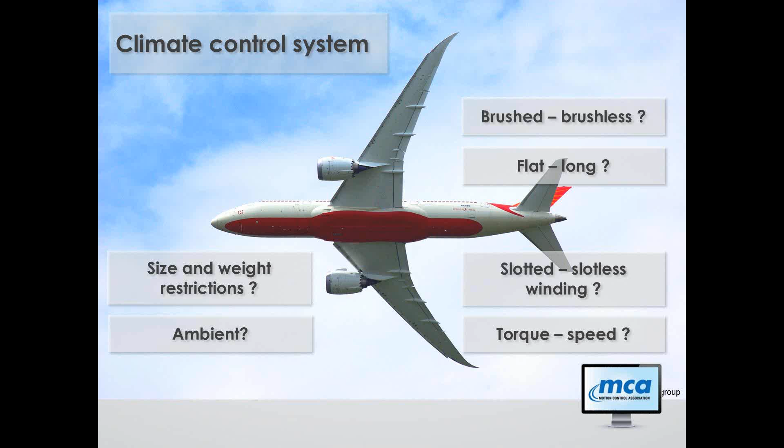Before we start to answer all these questions, let's look at the kind of motors we are considering during this webinar. It's all about small DC motors with permanent magnets, up to a power of less than 1 horsepower, so let's say approximately 700 watts. In the following, I'd like to treat these topics.

First, some background information about which motor designs are good for high speed or good for high torque. Second, I would like to address the selection of the commutation system - is this a motor without or with brushes? After that, a few remarks about slotted and slotless designs. And at the end, some guidelines for motor selection according to torque and speed requirements.

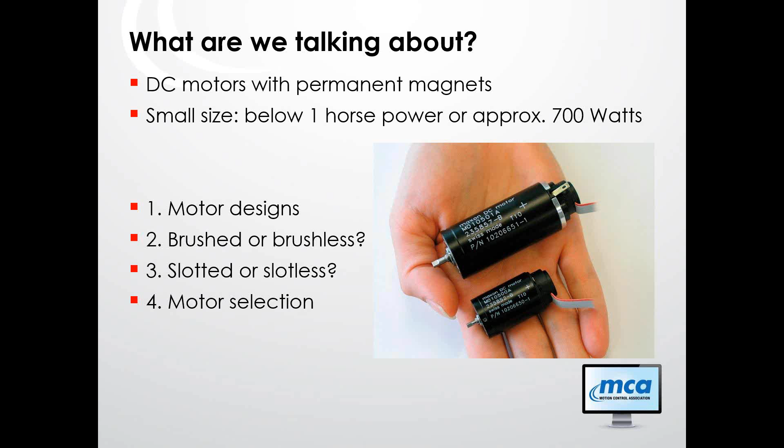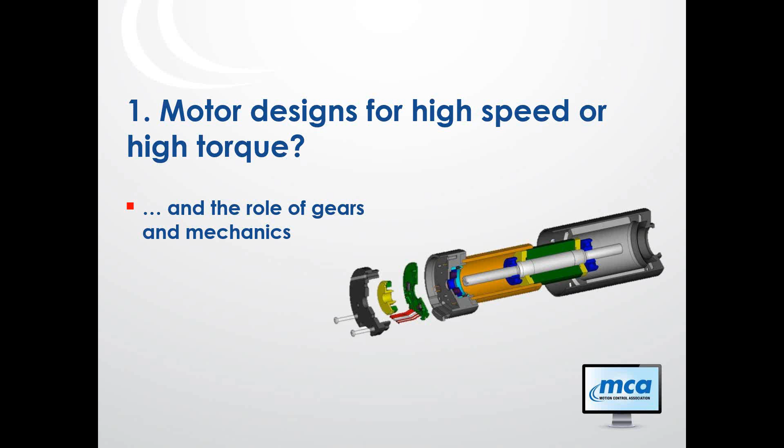So let's start with the motor design for high speed or high torque. In a natural and logical way, this will lead us also to the role of gears at the end.

We represent the speed and torque capability of motors in a diagram with torque on the horizontal axis and speed on the vertical axis. Here, the axis scale is something like logarithmic, but don't take the axis values as absolute - they should rather give an indication of the order of magnitude of speed and torque.

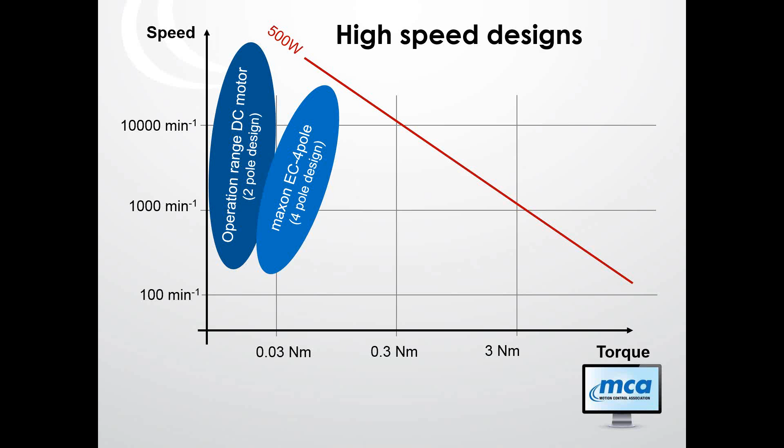Motors that can run at high speed but rather low torque are typically long and have a rather small diameter. This allows keeping rotor inertia and unbalance low, and at the same time the bearing distance large - both important for low noise and low vibration operation.

Here we find the standard brushed Maxon motors with one magnetic pole pair and coreless winding. For speeds above 10,000 RPM, brushless motors with similar electric and magnetic designs are used. Motors with two magnetic pole pairs exhibit a higher torque density, however, at a somewhat lower maximum speed. Now, what are the typical applications for such high-speed motors?

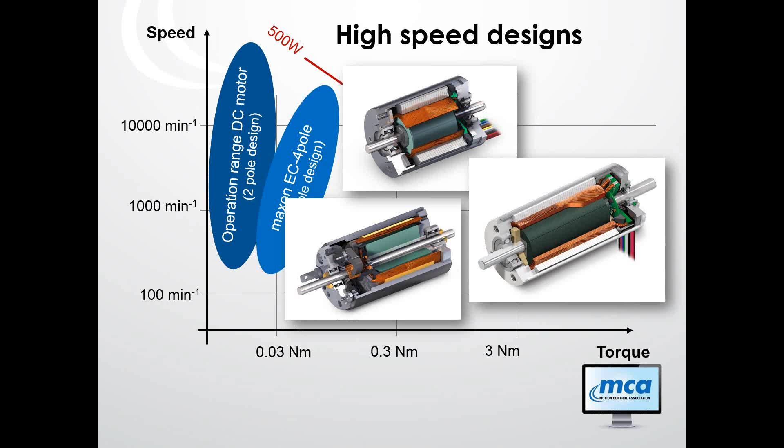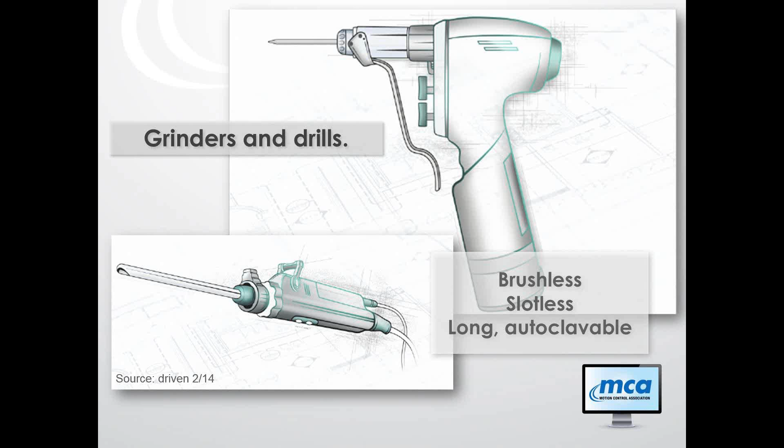Typical high-speed applications are grinders, millers, fans. Here are some examples from the medical field. They all use rather long, thin types of motors with a long shape and a small diameter.

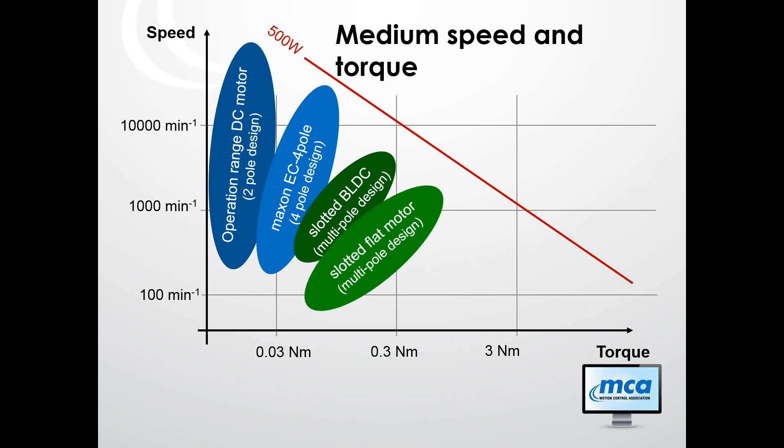The more magnetic poles we have in a motor, the lower the possible speeds, but the higher the torques in general. Multipole motors are usually made with a slotted winding for more precise magnetic flux confinement. Increasing the diameter with respect to motor length accentuates this design for high torque. So you find here typically the flat motors, often in a slotted design with external magnet.

An interesting design variant here is to place the rotor at the inside. The multipole magnet gives a high torque while the rotor inertia is still small. As a result, these motors are extremely dynamic.

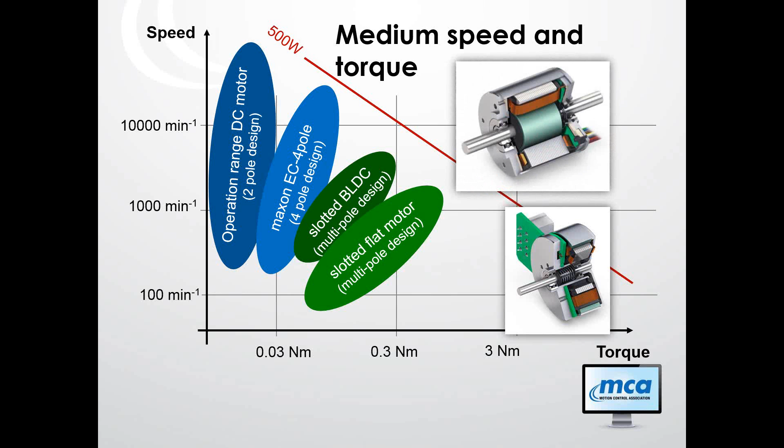A typical example for applications that need a relatively high torque at moderate speed are all kinds of pumps. In this example, a single brushless Maxon flat motor drives the vane pump of the air cushion. By varying the filling of the air chambers, the passenger can steplessly switch between firm and soft settings. What a nice feeling if you're traveling business class.

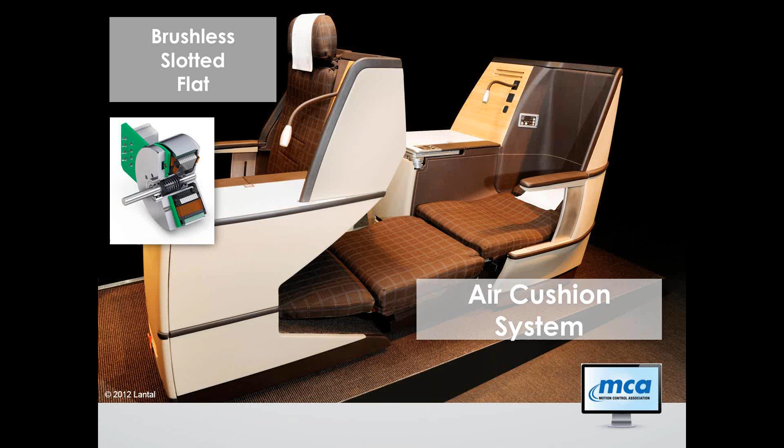Going back to our diagram, maybe a word about stepper motors. What do you think? Where do they fit into this diagram? Let me answer this question at the end of this section.

In real life, however, there are many applications that don't need real high speeds, but rather what they need is high torque. Let's say speeds below 1,000 RPM, but torques of the order of a few Newton meters. Many manufacturing or humanoid robots work in this range.

If we continue the motor design path towards higher torques at even lower speeds and using more and more magnetic poles, we end up with something that could be called multipole direct drive. You can find such motors under the name of torque motors as well. Essentially, true linear motors could also be placed into this category.

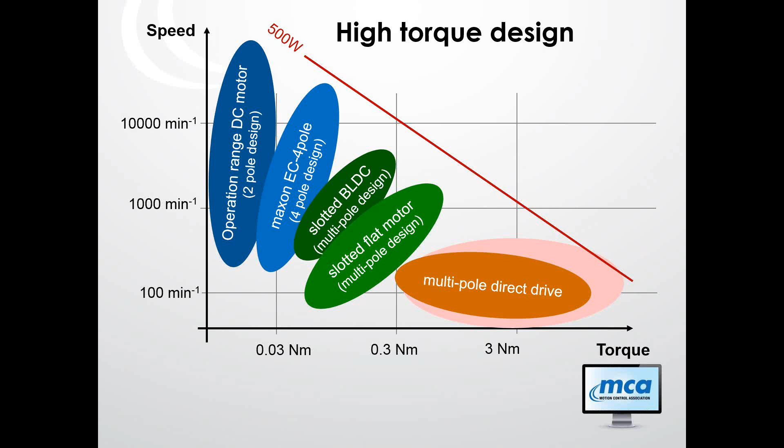This is why an alternative is to use standard higher speed motors off the shelf with mechanical transformation elements such as a gearhead. In most cases, the costs are just a fraction of a large direct drive motor. Motor gearhead combinations are standard products of many manufacturers, and you can really get them off the shelf in a proven design and with many variants and options.

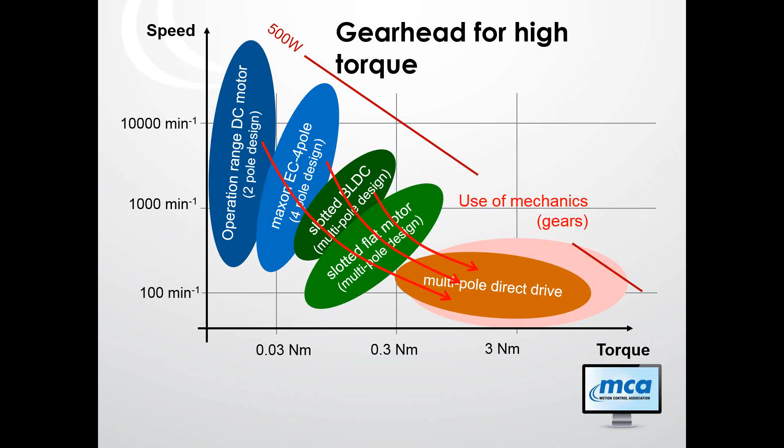A very special kind of mechanics is used in the robot, a robot that mimics the construction of the human body with motors and springs as muscles and ropes as tendons. It's, in my opinion, a nice example to show that mechanics needs not to be a gearhead all the time.

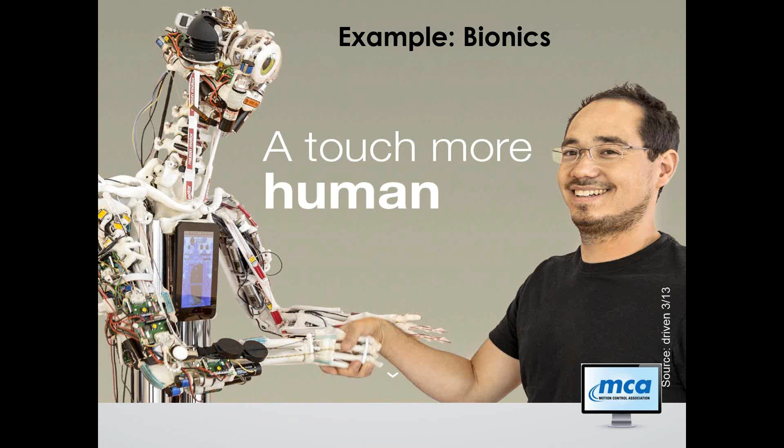So here we come back to the question about stepper motors. Stepper motors are characterized by rather low speed and limited dynamics and acceleration properties, so I place them in the lower speed, lower torque corner. Steppers often exhibit a relatively high noise and vibration level, depending on the sophistication of their control. Their advantage lies in the built-in positioning, which makes them interesting for positioning tasks.

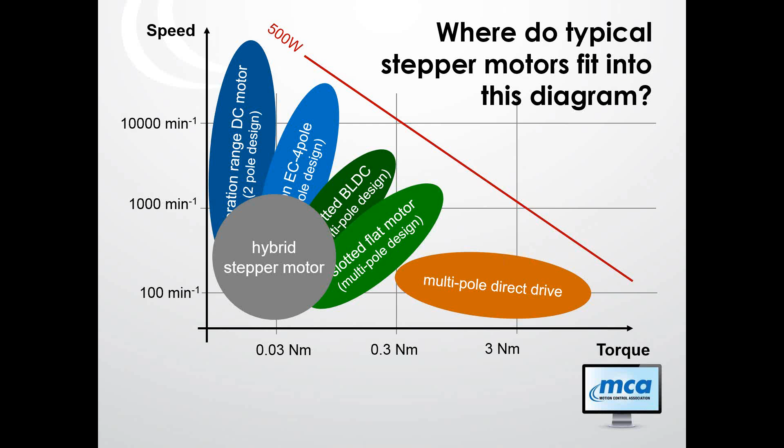The lack of time here does not allow us to go deeper into the DC stepper motor comparison, so let's stick to the DC motors. The next question we address in this chapter is: what's the difference between a brushed and a brushless motor? At Maxon, brushless DC motors are called EC motors. EC stands for electronically commutated motors.

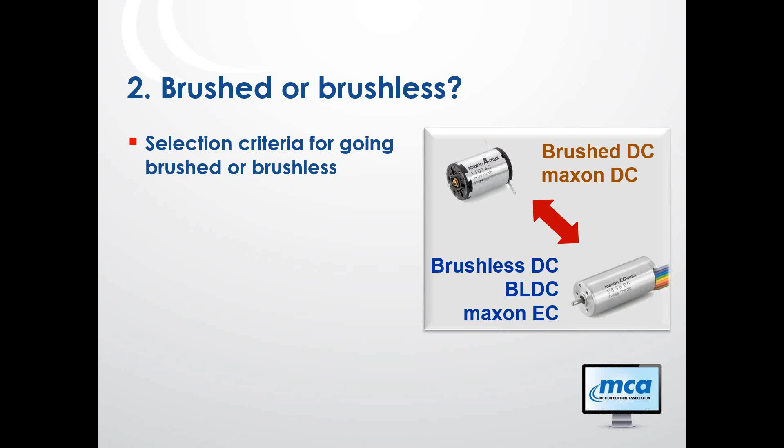The most important difference between brushed and brushless motors is service life. Brushed motors suffer from a limited service life of the brushes. Usually you can achieve a few thousand hours, in best cases up to 10,000 hours, in worst case less than 100 hours. Brush life is difficult to predict and there's no secure way to calculate it. A lot depends on the use: high current, high speed, left-right operation, high vibration reduce service life. All you can do is make some guess on service life by comparison to similar applications and operating conditions.

A few thousand hours of service life, however, are sufficient for many applications. Some applications with continuous operation need more service life — maybe several 10,000 hours — and the use of brushes should be avoided.

In brushless motors, the expected life of the ball bearings essentially limits the service life. Ball bearing life is much better understood than brush life and can be estimated quite accurately. Typically, they're made for several 10,000 hours.

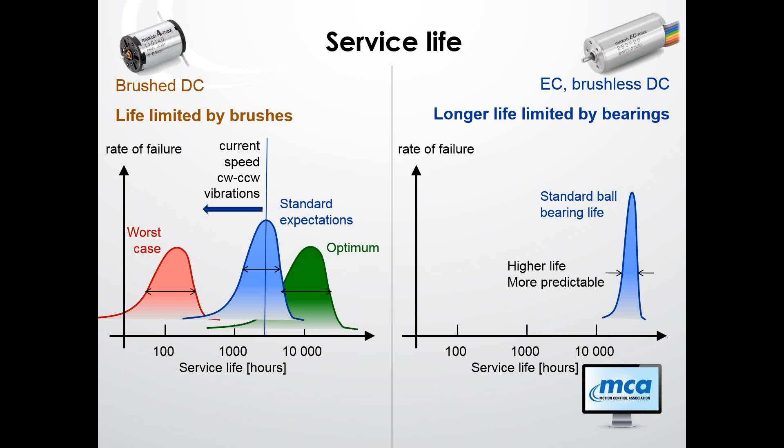But still, keep in mind, there are many applications that really don't need the high service life of a brushless motor. In motorized golf caddies, for example, service life doesn't need to be really high. Assuming 2 golfing days per week and 1 hour of effective operation per course, you get about 100 hours of operation per year, so there's no need to go brushless. The service life of a high-efficiency brushed motor is perfect.

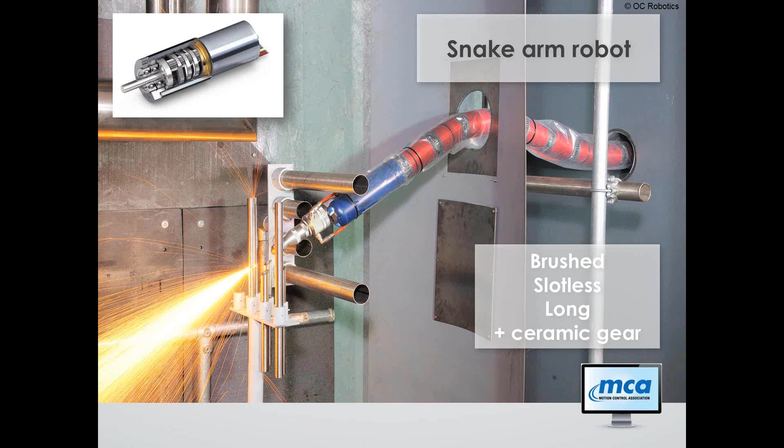The situation is completely different in this snake arm inspection robot for use in aircraft assembly, nuclear power plants, or the inspection of sewage systems. Operation might be up to 24 hours a day. Accordingly, a brushed motor design with a high service life ceramic gear is used in this case.

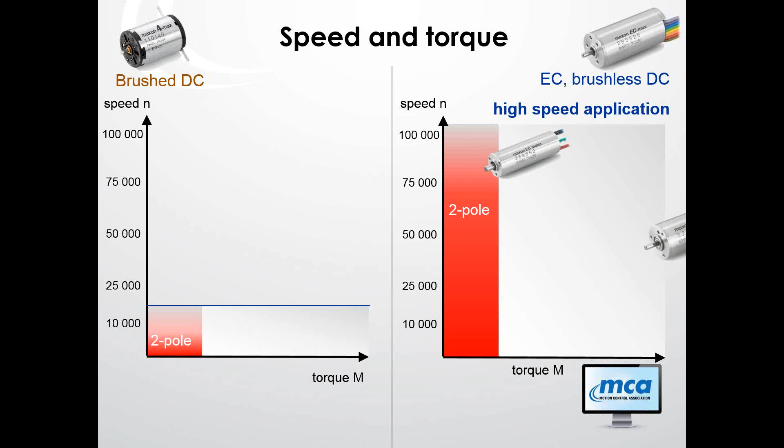What are the differences between brushed and brushless motors concerning speed and torque? As a starting point, let's take a brushed DC motor of a given size. In most cases, maximum speeds of DC motors are limited to values below 20,000 RPM. A brushless EC motor of similar size and magnetic design can be operated at much higher speed, reaching 100,000 RPM in some cases. These are perfect motors for applications running at high speeds, such as grinders, cutters, and some blowers. As mentioned before, brushless motors are often made multi-pole with a slotted design. This enhances the torque, but at the cost of speed.

Do you have any idea what happens to a brushed motor if operated at these high speeds?

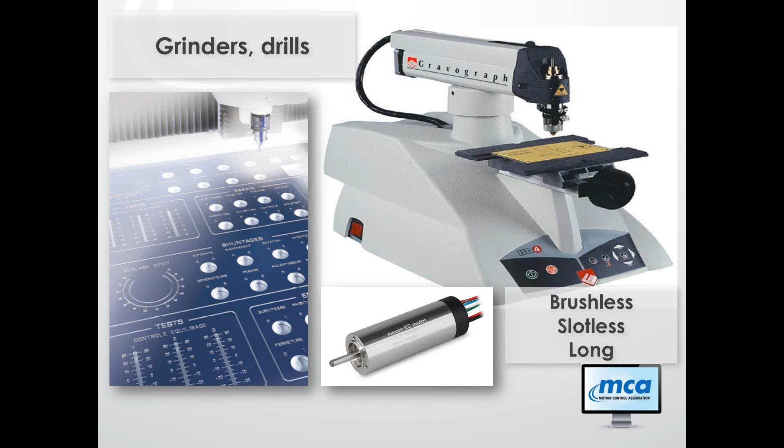Coming back to my question, brush motors can also be operated at higher speeds than specified. However, one has to expect a strongly reduced service life due to increased electrical and mechanical wear. The brushes start to vibrate, there's more brush fire, and the motors will be more noisy. However, keep in mind, you will have to look at the specific data sheet of each motor to get the information about maximum speed and torque capabilities of each unit.

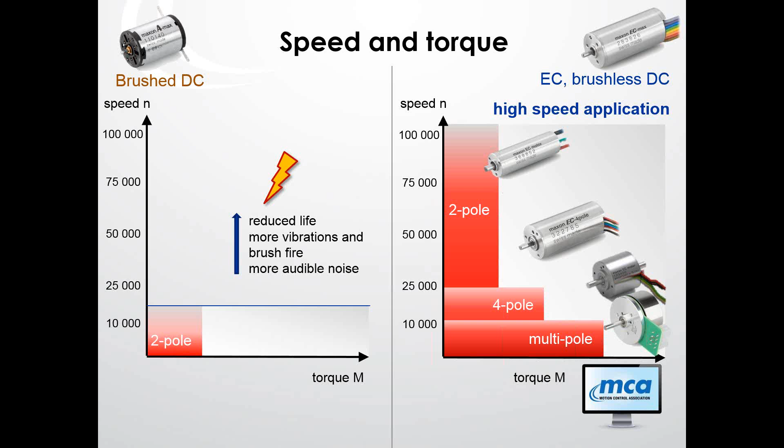How about the suitability of motors for special ambient conditions? Brushed motors can cause complications in special ambient conditions. Brush fire is at the origin of electromagnetic noise which might require additional damping. In explosive gas ambient, the sparks might also not be too welcome. However, note that the brushless motor is not explosion-proof by design. Further modification would be necessary.

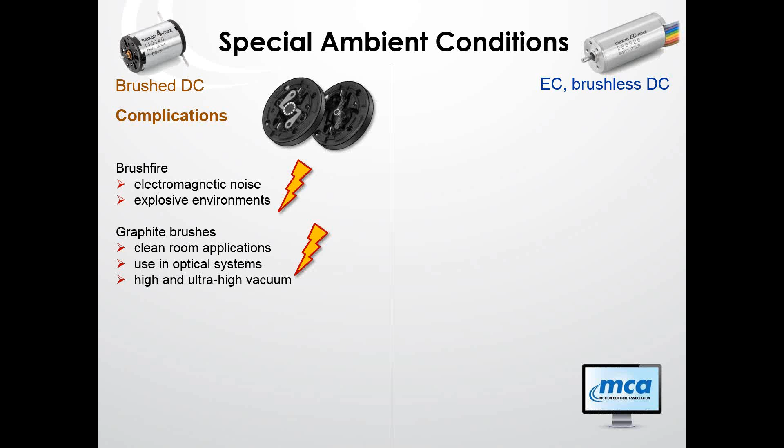Graphite brushed motors produce graphite dust that might pollute clean rooms, high vacuums, or optical devices. And graphite brush needs a little bit of humidity, but not too much, and oxygen in the atmosphere to work properly. Precious metal brushes are lubricated. As a result, both brush types show limited suitability for use in vacuum applications, for example.

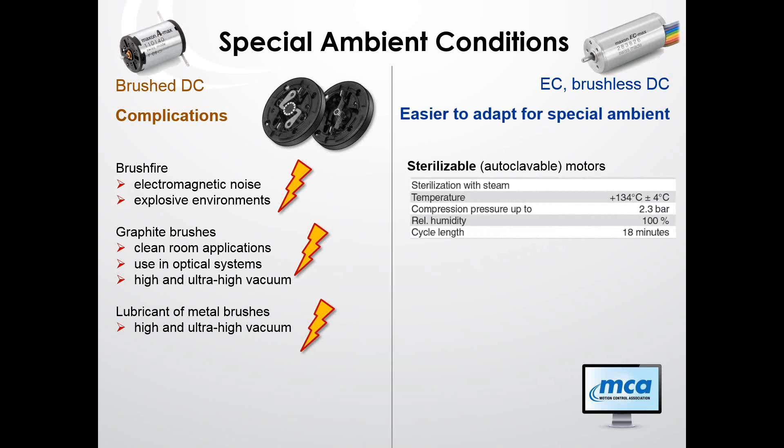Therefore, most motors for special ambient conditions are brushless. Think of motors that can be sterilized, or motors for ultra-high vacuum applications that need previous heating, or motors for space applications, or motors for downhole drilling that have to support high levels of vibration and temperature.

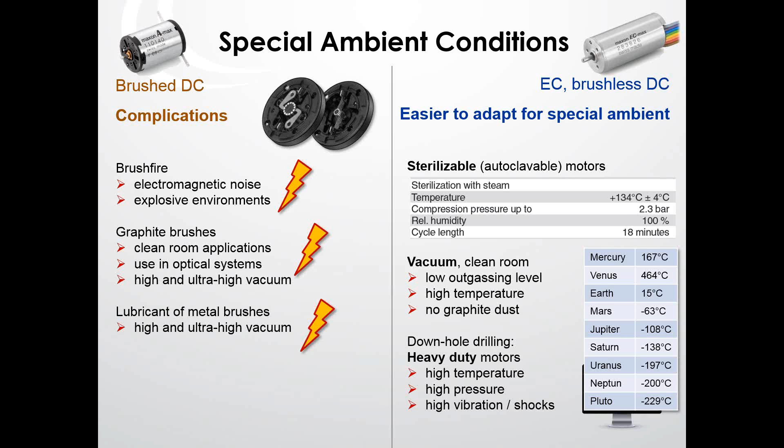Specially adapted heavy-duty brushless motors and gears are used in downhole drilling. They're made to withstand high temperature, high pressure, high vibration, and shocks. With a brushed motor, this would have been impossible to achieve.

The robust stainless steel construction makes the heavy-duty motors also well suited in high and ultra-high vacuum applications. In particular, they can easily withstand the previous cleaning and high temperature outgassing procedure.

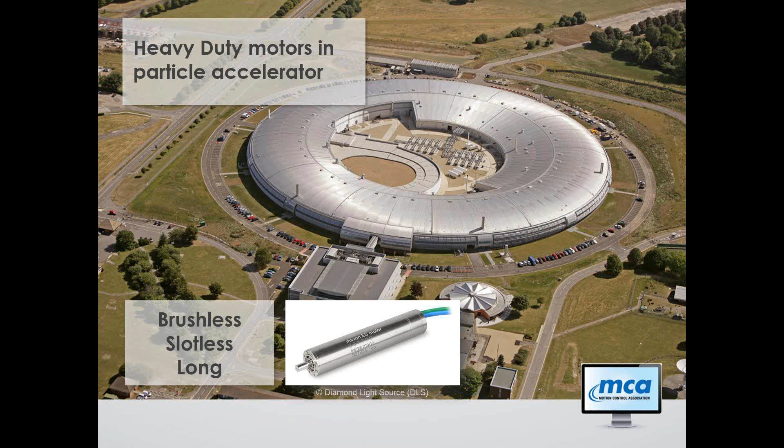When it comes to motor operation, let's compare again brushed and brushless design. I always say there's no other motor as simple to operate as a brushed DC motor. All you need is applying a voltage and the motor turns.

For operating a brushless DC motor, an additional piece of electronics is needed for the commutation. Cabling is more complex. There are up to 8 connections to be made just for running the motor, compared to the 2 connections for a brushed motor.

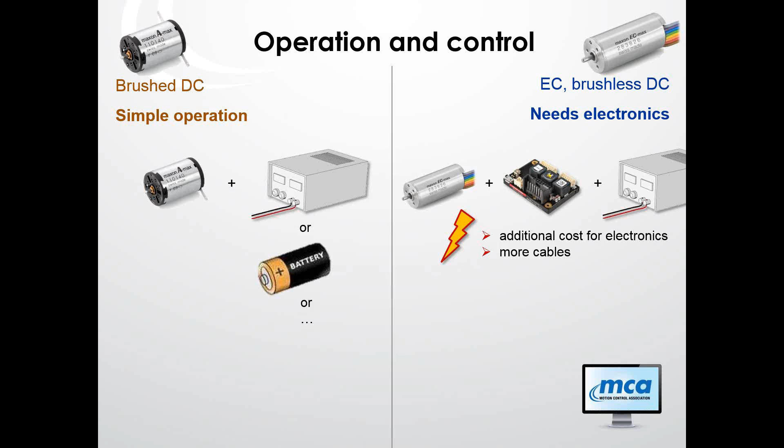The situation changes, however, in applications with a higher level of control. Usually, controllers for motor speed, position, or torque can be used with both types of motors, brushed or brushless. In such cases, the additional costs for the electronics, feedback, and the additional cabling effort are very similar.

Concerning ease of operation in a system with a speed or position controller, there is not much difference between a solution with or without brushes.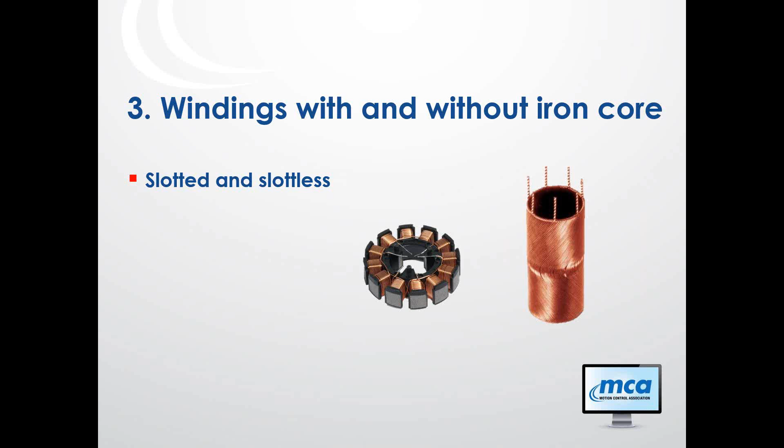In this third chapter, I would like to give some insight into slotless windings and slotted windings. In low-power conventional brushed DC motors, the rotor winding is wound around a slotted iron core for magnetic flux concentration and flux enhancement.

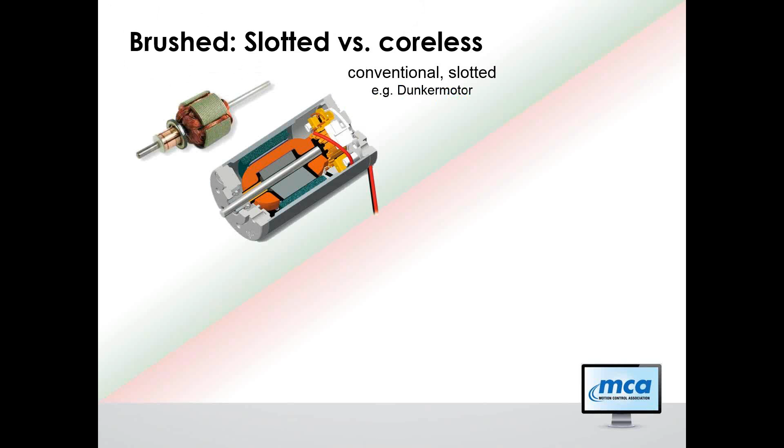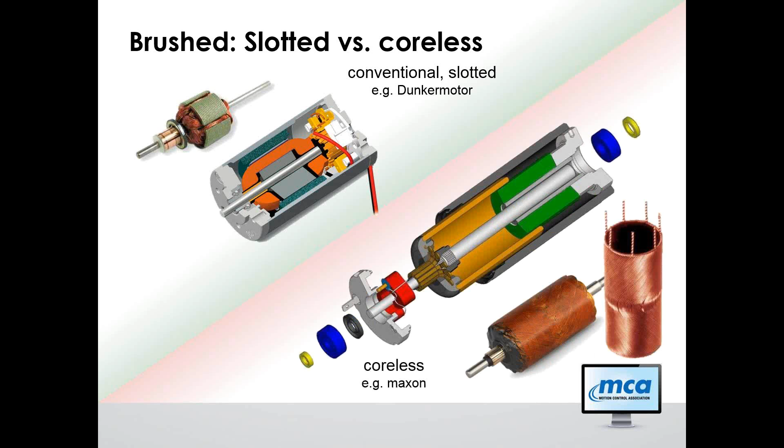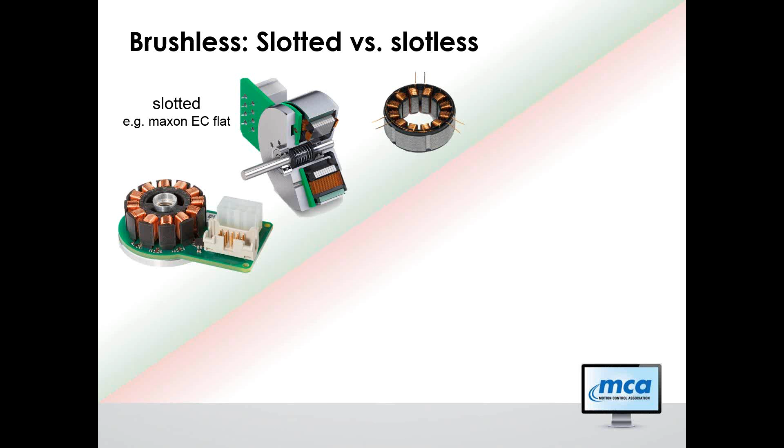Maxon DC motors are based on a coreless design. The winding is a hollow cylinder and it does not have an iron core. Similarly, brushless motors can be made in slotted designs. As we have already heard, slotted designs are often made multipole. Brushless motors with a low number of magnetic poles can also be made without an iron core for the winding. The same coreless winding type is used as on brushed Maxon DC motors.

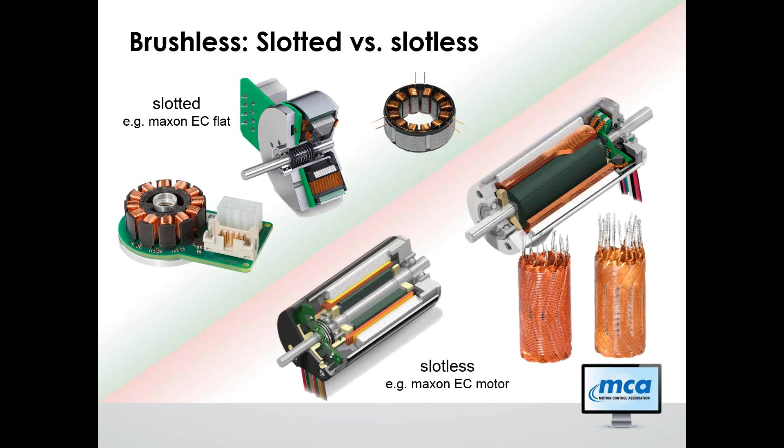Now, what makes coreless motors special? Coreless motors have no cogging. There are no soft magnetic teeth to interact with the poles of the permanent magnet. The produced torque is uniform and results in jerk-free and smooth operation even at low speeds. At higher speeds, the motor excites less vibrations than conventional motors with iron core, hence reducing the audible noise.

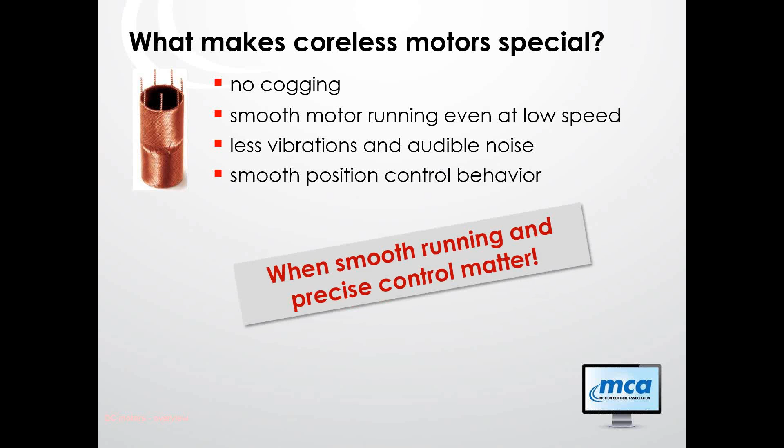From a control point of view, there are some advantages as well. The uniform torque is simpler to control and the motor lacks the tendency to stop at a preferred position. Please note, however, that on slotted motors there are different cogging levels depending on the actual design of the magnetic circuits. So you can get smoothly running motors, but also motors with very pronounced cogging.

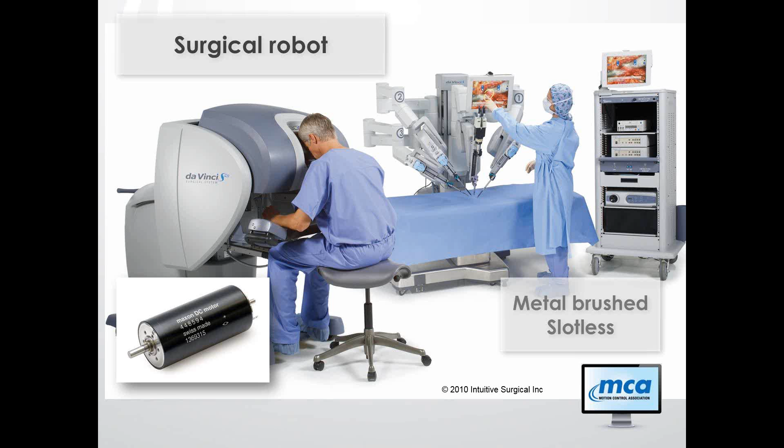In surgical robots, smooth and cogging-free motion is essential. Therefore, coreless motors are used. For the haptic feedback and force feedback, coreless motors with precious metal brushes are used. Precious metal brushes give a very precise and direct motor reaction, even with the slightest voltage changes.

Smooth operation at low speed is required in this telescope. The prime focus instrument package is positioned on a tracking device at the top of the telescope and it is equipped with 24 motion axes, 15 of which are motorized. The movements have to be executed smoothly and with high precision at various speeds, in particular at extremely low speeds. The motors used are coreless EC motors. In addition, for a smooth motion at low speed, it is essential to use sinusoidal commutation.

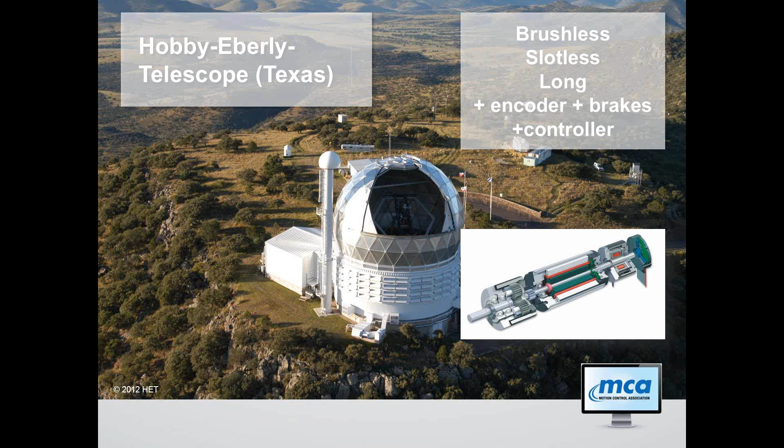In a slotted design, the iron core permanently changes its magnetization. This consumes energy due to hysteresis and eddy current power losses that grow with the square of the motor speed. By contrast, in a coreless motor, at least for brushed motor, the magnetization is permanently impressed and constant. Hence, there are no iron losses. As a result, the power losses are smaller and the efficiency is higher.

Now, what do you think? Why is efficiency so important for handheld tools? Let me give you some hints by looking at two examples.

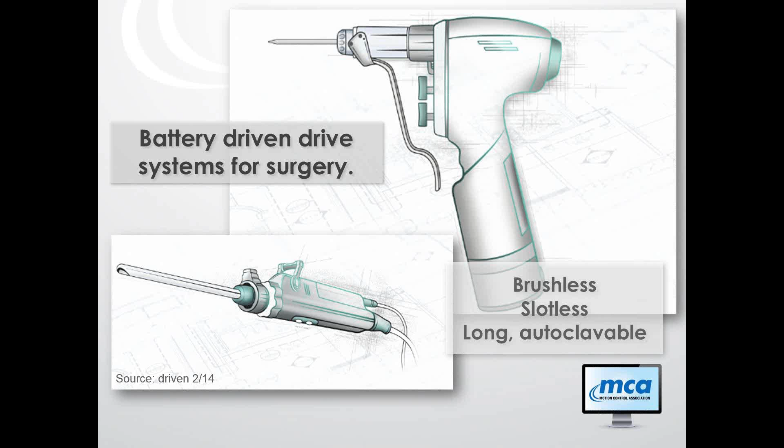A typical application where high efficiency is required is battery-driven medical power tools. Besides this, the motors need to be autoclavable here, which is best realized with a brushless design. A high power density and efficiency as well as low heating is required in miniature devices such as this insulin pump.

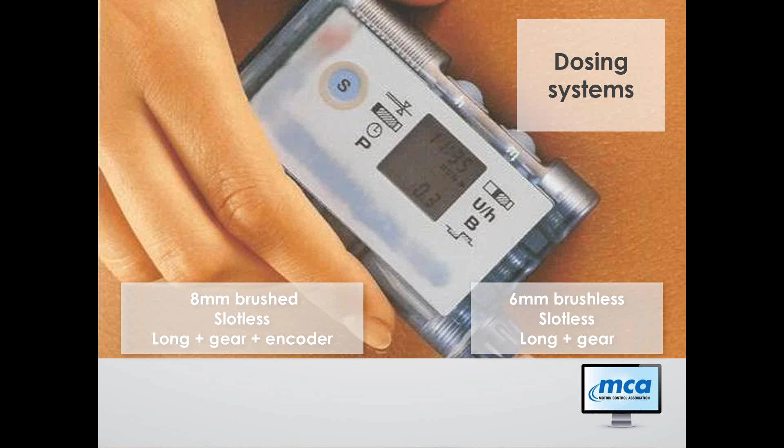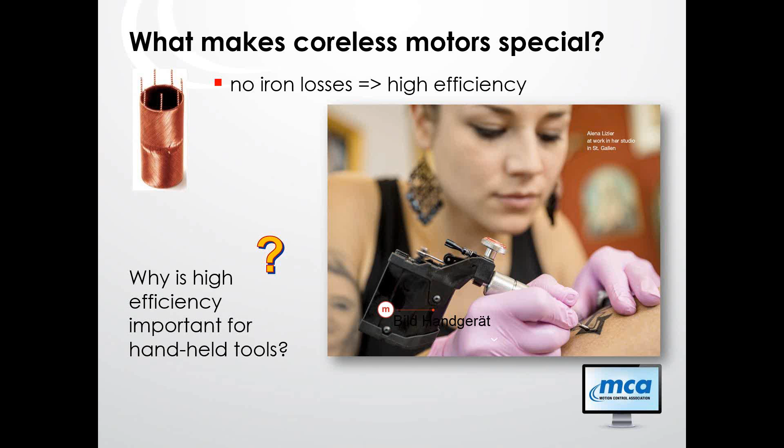And here are some reasons why in handheld tools a high efficiency might be important: it's a lower power and current consumption, it's a lower heating, and it's a smaller motor and less weight.

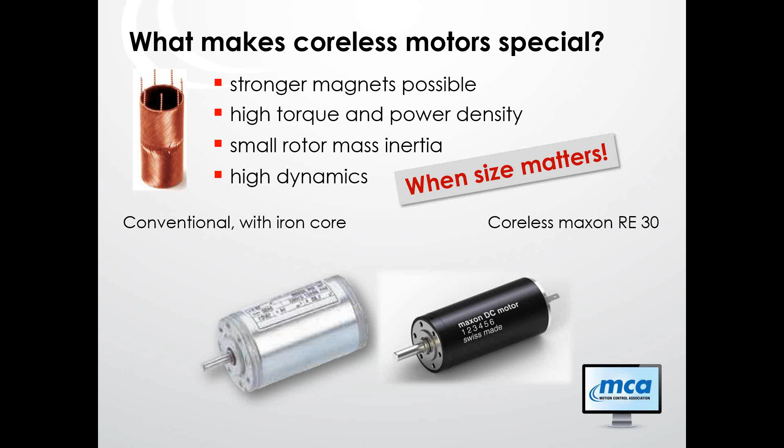The use of high-performance magnetic materials results in compact motors with high power density. Comparing these two brushed motors of similar length, we recognize the smaller diameter and weight of the coreless designs at the right. Without iron core, the rotor is a hollow cylinder with a considerably lower mass inertia.

In combination with the high torque, this results in very dynamic drives with mechanical time constants and acceleration times of a few milliseconds only. At the same time, the rated torque is more than twice as high on the slotless than on the slotted design. All this is a consequence of the much stronger magnets that are possible in a coreless design.

However, be aware that there are slotted multipole designs with extremely good dynamic behavior as well, and torque per volume as well. For example, the Maxon EC and ECI series that we have already seen.

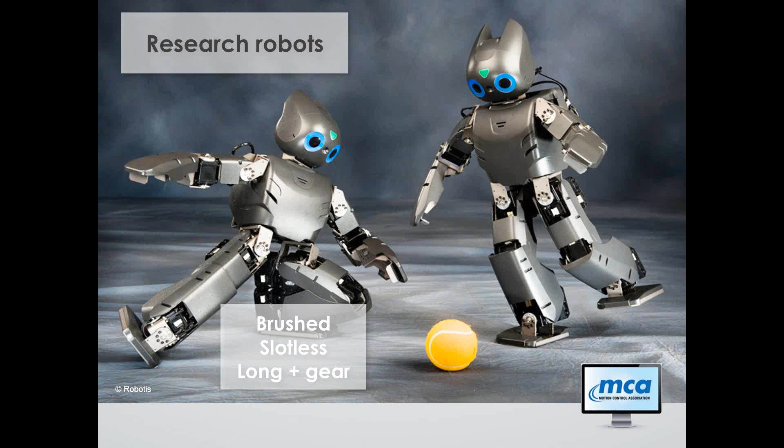This robot named Darwin is used mainly for research and education purposes. The user can easily program the robot according to his own wishes, as the system is based on open source. The very quick and precise movements of the robot are executed by brushed Maxon motors. Each joint is made of a so-called Dynamixel with a slotless DC motor with a high power density.

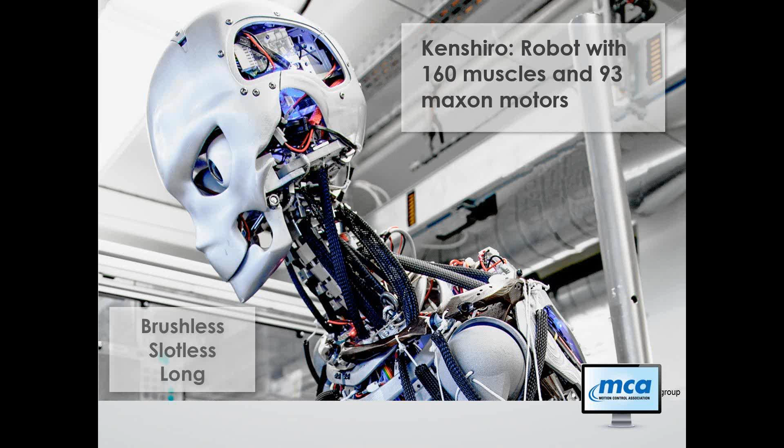So, this leads us to the last section, where I would like to sum up the main motor selection criteria regarding speed and torque. It's just a short summary for the sake of completeness. There is not really enough time to go into all the details. But if you want to see more and learn more, you can also find the Maxon selection videos on the Maxon website.

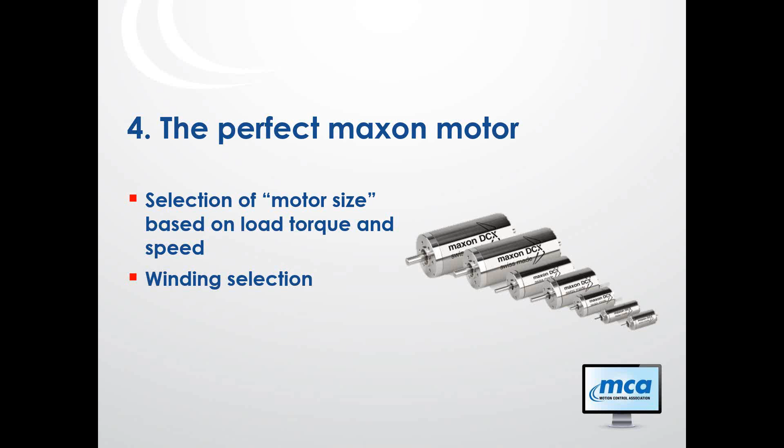The starting point for motor selection is the motion of the load in the application. So what you need to know is the operating cycles, the speed profiles and friction needed to move your load, and this gives you the speed and torque requirements that you have to fulfill.

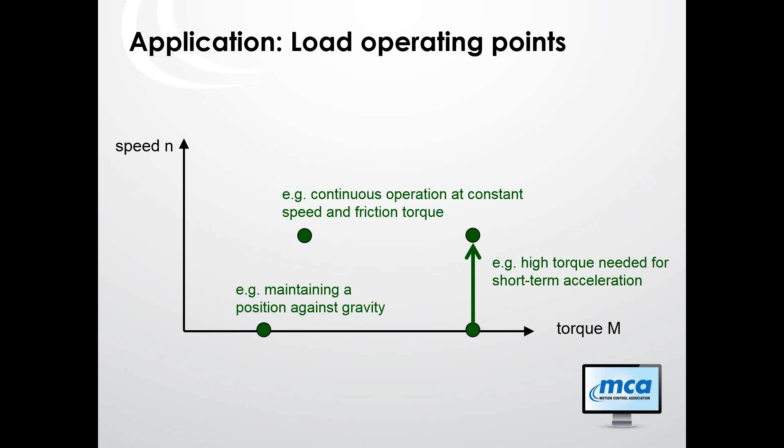In case of mechanical transformation, think of gears and screws and others, the values at the load have to be converted first to the motor output shaft. In our standard diagram with motor speed as a function of torque, this can be represented as points of operation. For example, there can be constant operation at a given torque and speed, or maintaining a position against some external force at zero speed. Another possibility is speeding up with some mass inertia to overcome, usually where the highest torque occurs.

Regarding torque, we condense all the operation points into a few key values: the average, root mean square load torque, and the extreme operation point, usually at the end of the acceleration, where the maximum load speed and maximum load torque occur.

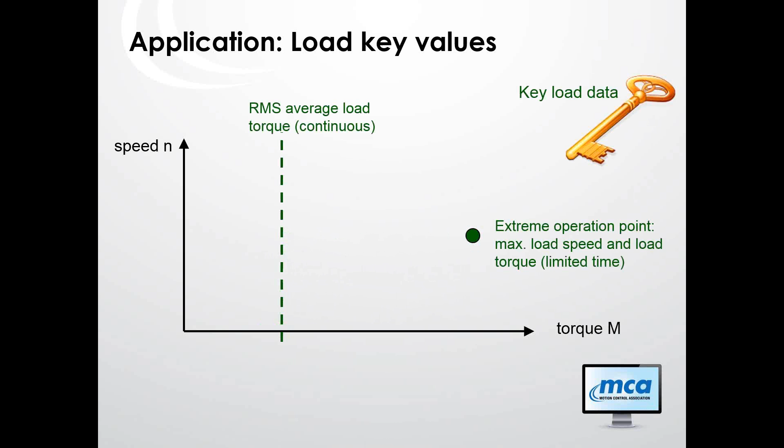Let me first have a look at speed. We need a motor with a speed limit that is high enough to cover all operating points. The speed limit of maxon motor corresponds to the upper limit of the operating range diagram.

However, it is essentially the required torque that defines the motor size. So we have to select a motor with a nominal torque larger than the root mean square average load torque. Short peak loads, as during acceleration, may be located in the short-term operating range, in the white area.

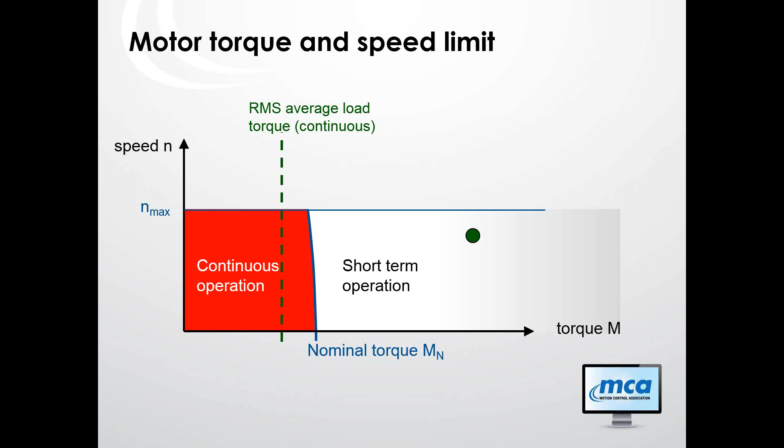The maximum permissible speed of maxon motors can be found in line 23 in the specification section of the motor data. The torque capability of the motor type is given as the nominal torque in line 5 of the motor data. It's a characteristic parameter for a motor type and size. It limits the continuous operating range, that's the red area.

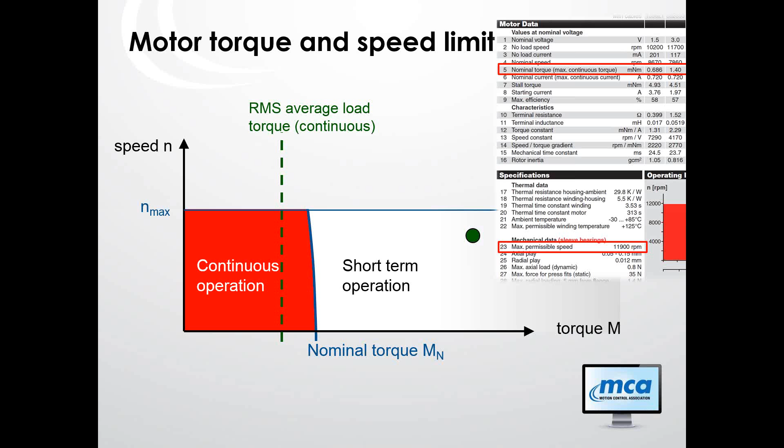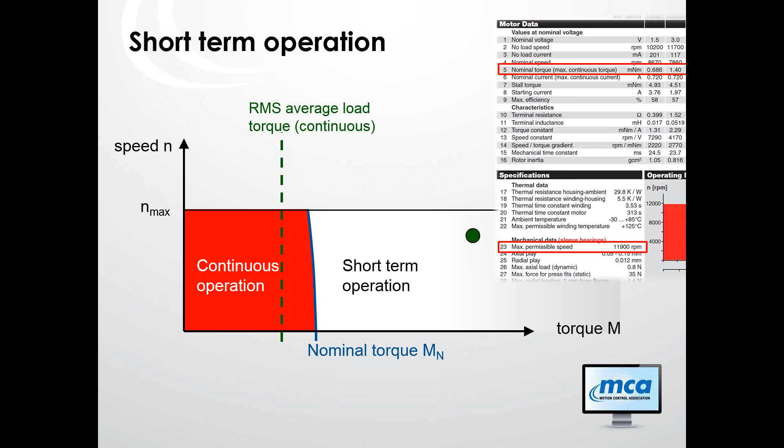A few comments about short-term operation. Higher torques than nominal are possible, but only for a limited amount of time. How long an overload situation may last depends on the amount of overload torque and the motor type. As a rule, the larger the motor, the longer the overload can be.

Typically, overload can last several seconds as indicated by the thermal time constant of the winding. Roughly speaking, a motor can support 2 to 3 times the nominal torque for periods up to this thermal time constant of the winding.

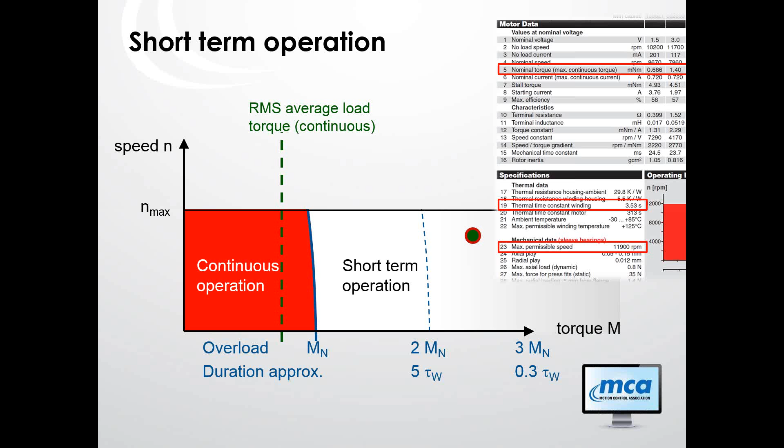For a given motor type, you usually can choose between different windings. The purpose of the winding selection is to match the available electrical power, its current and voltage, to the required mechanical output power of the motor, its speed and torque. The different windings of a motor type are listed in columns, the resistance increasing from left to right.

The speed constant decreases from left to right. So the first winding needs the lowest voltage to run at a given speed, the last winding on the right needs the highest voltage. The current consumption behaves just in the opposite direction. The left winding requires more current to achieve a certain torque than the winding on the right.

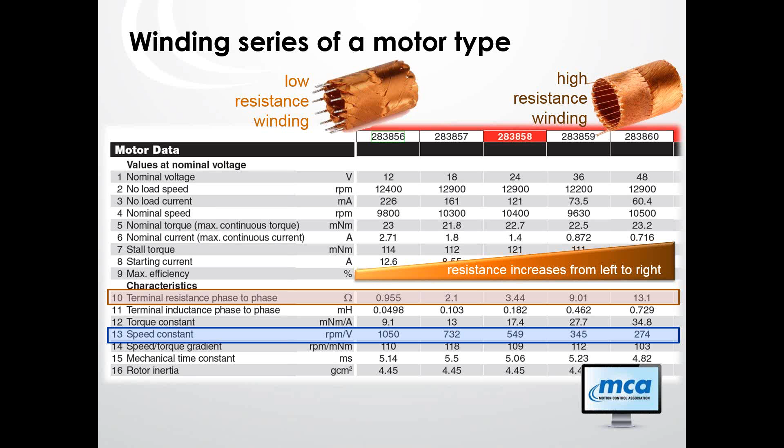Now, for a given application, the objective is to reach all the operating points with the available maximum motor voltage. Usually the most demanding operation occurs at the end of the acceleration. Here, it is the one at maximum speed of 8,000 RPM and maximum torque of 50 milliNewton meters. All the other operation points can easily be reached by reducing the motor voltage. In this example, we have a 24-volt supply.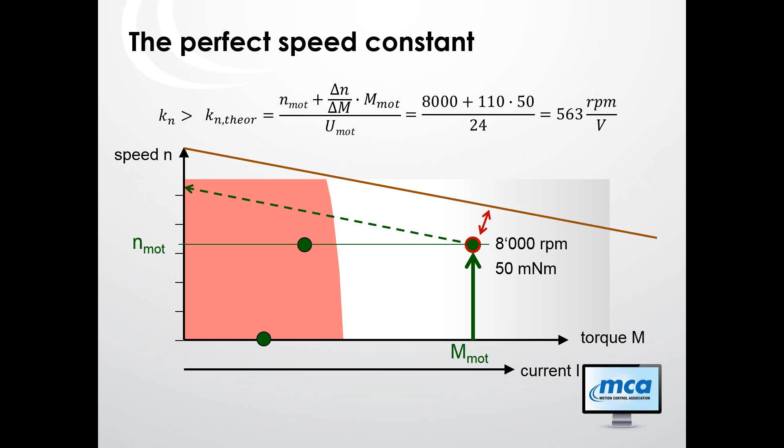So, I've presented you a lot of information about how to select motors, and let me try to give you a summary here. I'm sorry I have to disappoint all those people who wanted to have something like a flow chart to find the one and only motor and the one and only way to fit into a certain application. Usually, as I mentioned before, there are different possibilities. It's not just a question of the motor alone, but very often of the design concept of the whole device and whole machine that you want to use the motor in. So what I tried to give is some guidelines on which motor designs might be a good choice.

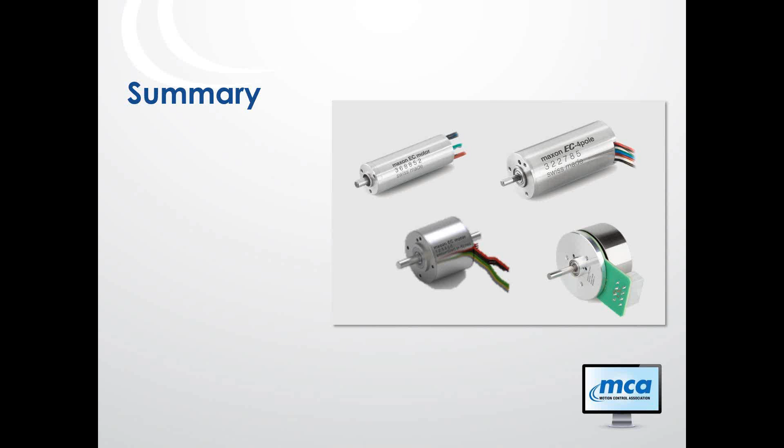So I think we can summarize my findings along the general lines of brushed versus brushless motor. For speed and torque capabilities of the motors, refer to the operating ranges and the continuous torque. For high speeds above typically 10,000 RPM, go brushless. Select coreless motors with a low number of magnetic poles. For speeds below 1,000 RPM, consider a gearhead, or go multi-pole and slotted.

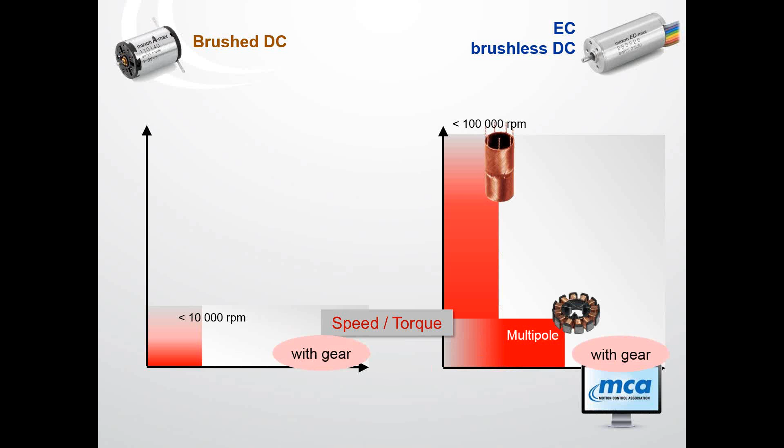Concerning service life, the statement is quite clear. Above approximately 3,000 hours of service life, go brushless. Below 3,000 hours, a brushed motor may work just as fine.

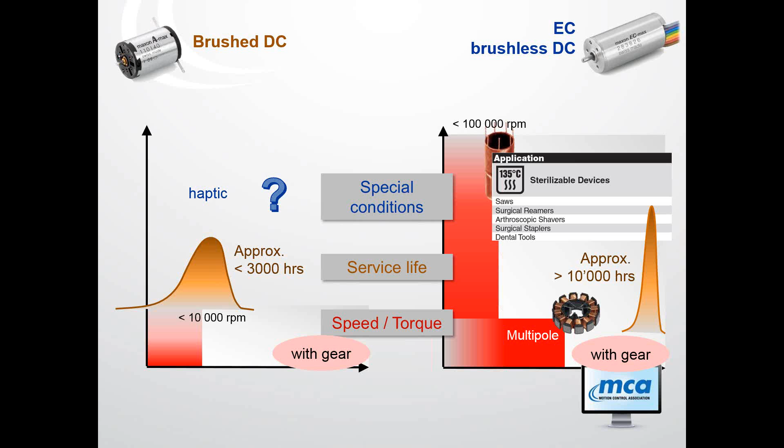In most cases, brushless motors are better suited or can be adapted more easily for special ambient conditions such as vacuum or sterilization. When it's about smooth operation and precise control, rather use slotless designs without iron core in the winding. These motors also don't exhibit cogging. For simple open loop control, brushed motors might be a lower cost solution.

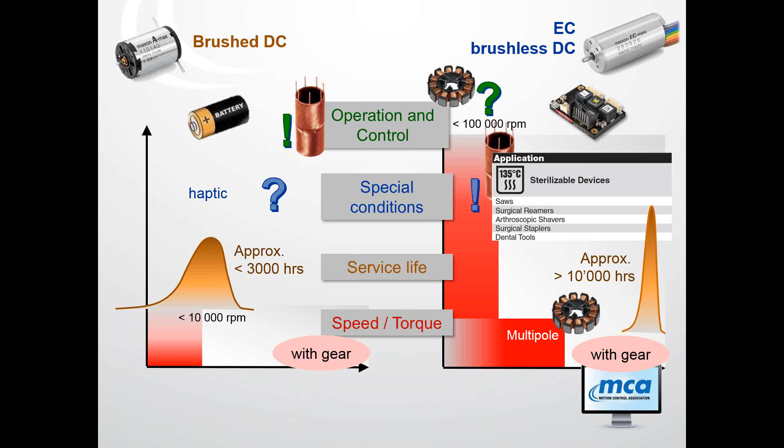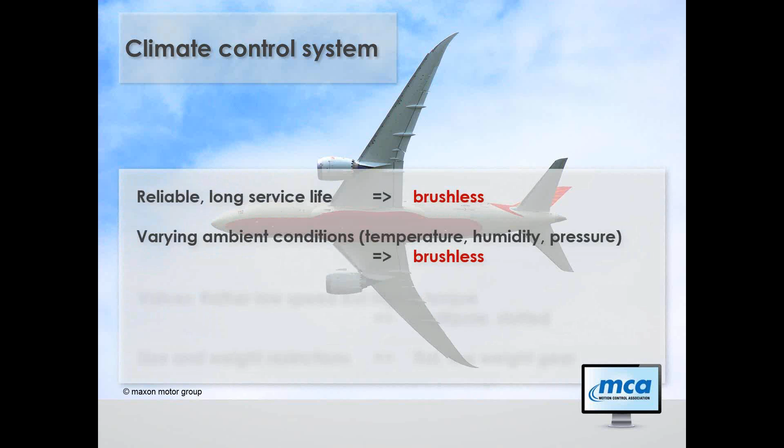Now to the end, let me come back to our first example, the climate control system in the Boeing Dreamliner. Analyzing the general requirements in aeronautics, one finds that the motors have to withstand a large temperature range and vibration range, have a long lifespan, and have to be very reliable. All this points towards a brushless design. The particular application here of a valve demands a rather low speed but considerable torque. In combination with some size and weight restrictions, this results in a multi-pole flat motor with some special gearing.

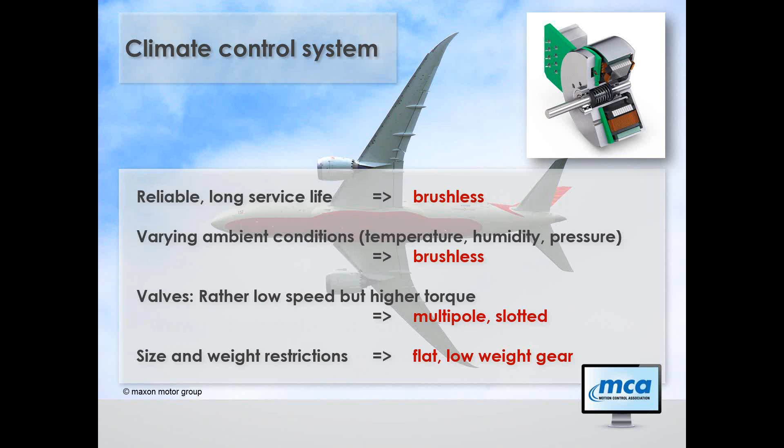That's it. Thank you for staying with me till the end, and I hope I could give you an insight into different motor designs and their suitability for various tasks. So I will now try to answer your questions on the chat, and I give back to Carrie.

Thanks, Eris. Yes, we do have a few questions to go over. The first is, are high pole count servo motors more difficult to tune than low pole count motors, and do I need special electronics to run multi-pole servo motors?

No, tuning of high pole motors is about the same as with standard motors. At the end, tuning is a question of relative amount of motor torque and load mass inertia in combination with the stiffness of the coupling between motor and load. So tuning and motor behavior and finding good control parameters at the end is a question of looking at the full system, at the full control loop. So it's not more difficult, I'd say.

And the second part was about if you need special electronics to run multi-pole servo motors. No, you can run them with exactly the same electronics. It's just that generally the speed of a motor will be lower with multi-pole motors, but good electronics will compensate for that.